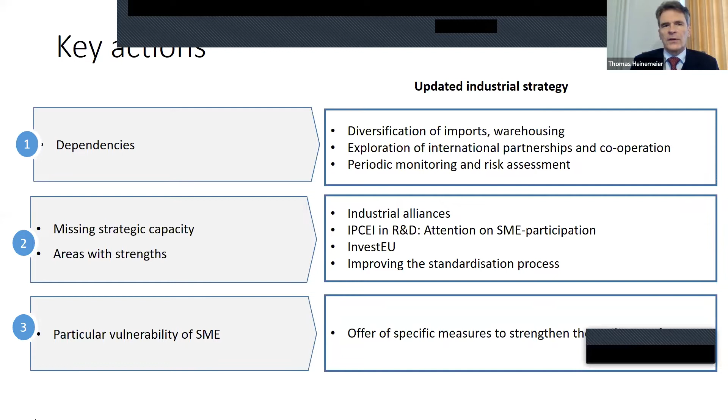In this regard, but not only, we will also pay particular attention to SME participation, especially, but not only, that also some startups can take part in these.

For the third lesson, the acceleration, the so-called transition pathways shall be elaborated to define what shall actually be done, what is needed in the industrial ecosystems to get the twin transitions actually done. I will come back to that later.

We are very aware that this can only be done together with industry, on one side the industrial alliances, but also to define what needs to be done, the industry forum. Here, in the context of the industry forum, we have a task force on advanced manufacturing, where the additive manufacturing topic is very prominent. CECIMO is actually one of the co-responsible organizations, and we are glad that they take over this function and work well together with us in this context.

Mr. Riquet has already mentioned it: the regulatory framework has to be set well for what is needed for the transitions. On one side, that one actually knows how the innovations have to be specified, what one has to do, but then also for the diffusion across the economy.

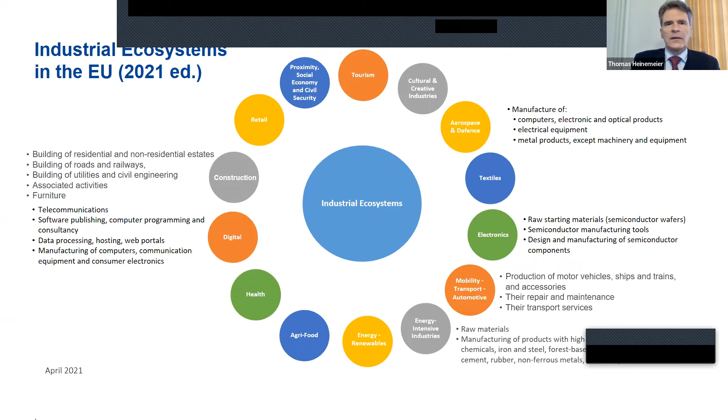Now, transition pathways will be defined per industrial ecosystem, as actionable plans dealing with certain milestones that have to be achieved in the future, the regulatory conditions, investment needs, how they can be financed, skill needs and possibilities, but also international aspects, like regulatory cooperation with our partners to reduce difficulties in entering other geographic markets, and also demand stimulation with regard to diffusion and others.

Now, these pathways we cannot define ourselves. Here we depend and rely on industry. The basis is that one needs a bottom-up understanding of what researchers and industry need. The Industrial Forum is one such instrument, already mentioned, but there are also, depending on the ecosystems and policy mechanisms that colleagues have, certain expert groups.

Then scenarios on possible pathways will be subject to public consultations. Two are already out. One may be of interest, especially on the material side for you, which is the energy-intensive industrial ecosystem.

Thank you, David. Before I start, I just want to say thank you for your support on this initiative today. It's nice to see you again. Thank you for the floor, and thank you to everybody else for their participation today. I've just got a few slides to show you before we get on to the really interesting subject, which is, of course, the panelists. So I won't take too much of your time.

Briefly, for those of you who are not familiar with CECIMO, we are an umbrella organisation that has served since 1950 the common interests of machine tool industries and related manufacturing technologies, both at EU and global level. CECIMO promotes our industries in Brussels, and we are experts in the field of economy, technology and innovation for those sectors. Our members consist of 15 national associations who themselves do a fantastic job of promoting AM and its best practice use in their specific countries. So we're very much a collaborative approach across Europe.

The association's goal is to promote the AM sector, raise awareness to policymakers and other relevant stakeholders, hence the conference today. We offer a platform for the AM community to discuss elements of their business, and in particular those subjects important to them: market growth, and indeed barriers to growth, be they regulatory or non-regulatory. We also talk funding, from R&D through to production of parts. We support efforts on standardization and certification, which are incredibly important for our industry to grow and mature. And also, of course, a subject very close to my own heart, the skills shortage.

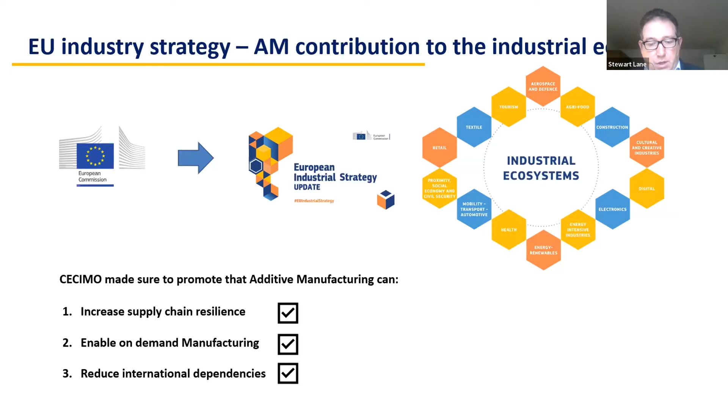The second initiative is the circular economy action plan, also launched in 2020. Such a plan includes several policy initiatives that will bring the EU closer to increasing its overall sustainability objectives. Although many of the circular economy action plan initiatives focus on a limited market segment, they provide an opportunity, and I think we heard about these horizontal classifications earlier, for governments and business to look at technologies that enable sustainability.

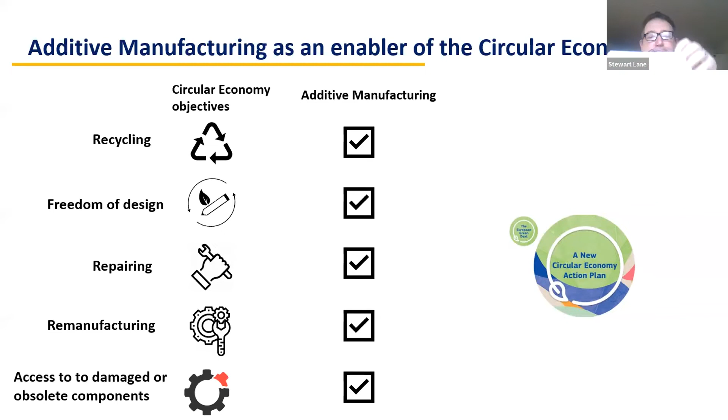As the US remains a key commercial partner for the European machine tool industry, CECIMO will be an active member of this new platform, and we will provide critical input on harmonized standards, export controls, and indeed global trade challenges.

Finally, we must all recognize that there will be no digital and green transition without a skilled workforce. Therefore, industry and policymakers have an unprecedented opportunity to finance and develop specific measures to prepare the workforce for the many changes brought by this new digital and sustainable transition. The lack of available skills in additive manufacturing remains one of the largest challenges for our sector's potential.

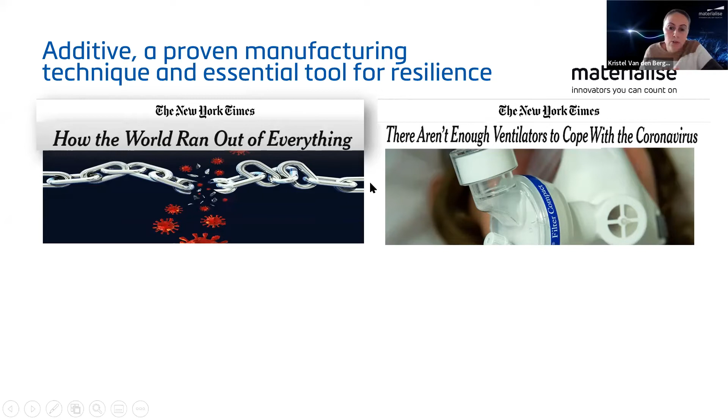So this only strengthened the growing reputation of additive manufacturing as a real tool for resilience, but also as a valid tool for production, end part production, both in aerospace. It has gained its mark as well in very certified environments like the medical implant sector.

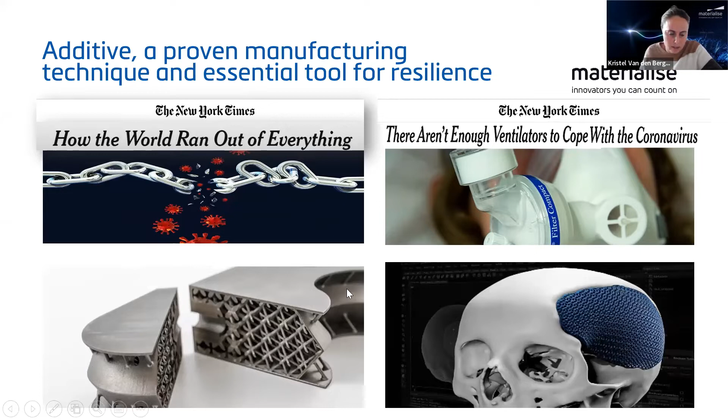Now, this is good news because additive is really moving high up on the agenda of business leaders, not just business leaders, also policymakers. And that's great. In fact, 90% today of leaders want to adopt additive manufacturing as a manufacturing technology.

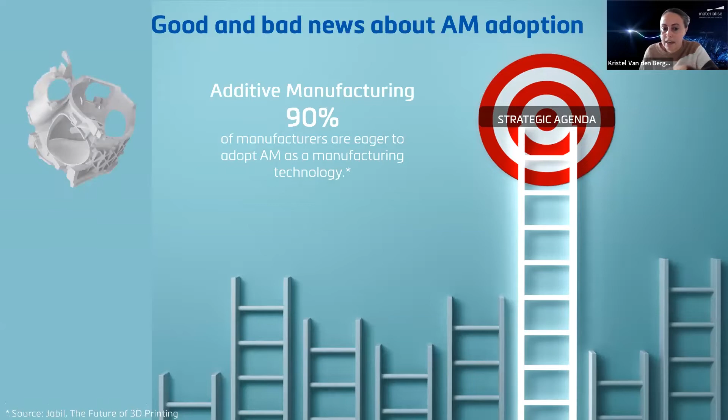The bad news is that today, 80% of manufacturers are still working mainly on rapid prototyping. So how do we explain this gap?

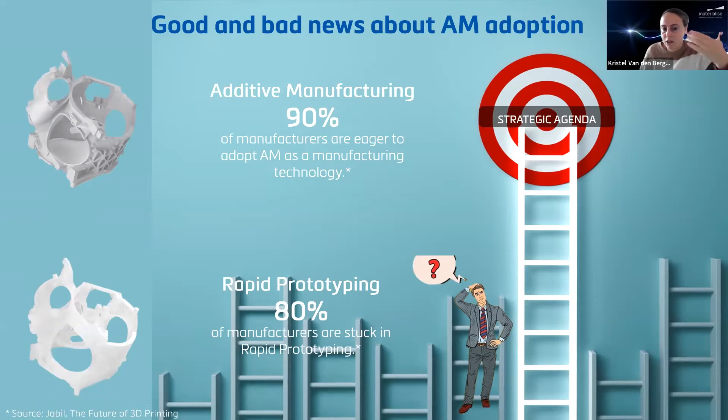Well, because rapid prototyping, which is really enabling fast product development, is a whole new paradigm compared to certified additive manufacturing. In prototyping, it's all about speed, but these prototypes don't need to meet end requirements, so they mainly serve illustrative purposes or to speed up development. Whereas when you're really talking about parts that go into airplanes or parts that go into bodies, obviously there you need to meet a whole spectrum of requirements.

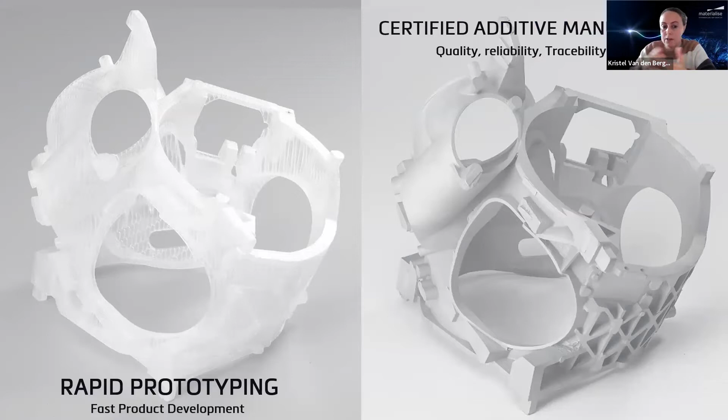You need to also ensure the quality, reliability, and traceability. So this is a huge challenge, and to get from point A to point B is quite a complex journey.

In fact, Materialise has been in this space for more than 30 years. So the first thing we actually built are the three core capabilities you need to be able to produce. We are a leader in software for additive, we have one of the most complete additive manufacturing plants in the world with a very broad range of materials and different printing technologies, and we have the largest pool of engineers — software engineers, clinical engineers, and medical and design engineers.

Now you could say, wow, that's already a great achievement and we're enabling a lot of companies, but this was never the end goal of our company. The end goal really was enabling new and meaningful applications of 3D printing, and that's something we've also done in parallel.

So here on the left, you can see our vertical applications. We are producing our own medical implants in Leuven, in our ISO 13485 production facility. We have a whole production line now set up for eyewear frames. We are in the business of tooling for automotive, and there are other production lines not shown here.

And so when I speak about applications, it's really about going from an idea, a vision of revolutionizing healthcare, which we started 20 years ago, to now today going up to a fully certified and automated production line specifically for that application.

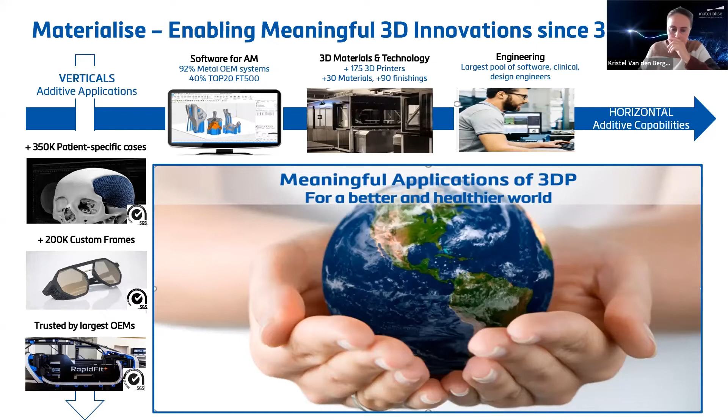And going through this journey really gave us some important lessons. The first lesson is that additive manufacturing does not start with buying hardware. It's not plug and play. It doesn't happen overnight. Now you could say that's a very obvious thing, but it's really not, because I've seen so many hospitals and companies sitting on very expensive equipment just collecting dust, because they haven't thought about the applications, the needs, the product requirements, and they get stuck in a sunk cost fallacy. So that's a lesson we've learned.

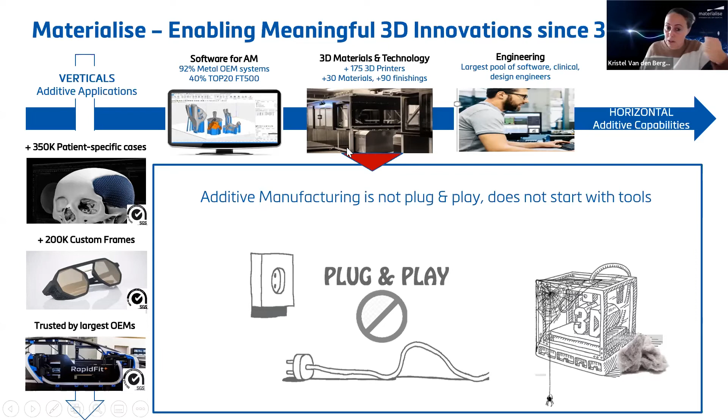And a second lesson we've learned: additive manufacturing truly is a complex journey, with really distinct stages and phases you have to go through. Once you have your application and your business case, you want to scale up production and invest in the right equipment. But many companies skip a lot of these steps.

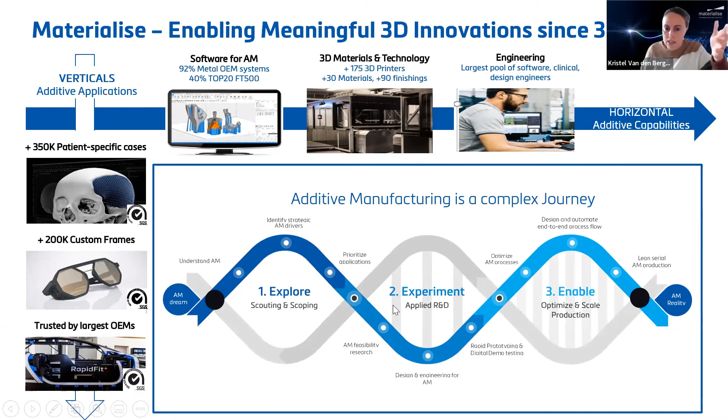Now, to be successful at navigating this journey, there are two things I believe are really crucial. The first is you need an impetus for change—an important, urgent, and relevant reason. You don't want to 3D print for the sake of 3D printing. If you don't have that catalyst, or the business case isn't valid enough, you will probably not get through it.

The second point is you need guidance and expertise, access to knowledge, experience, and capability. So I was very glad to hear that is something the EU will also invest in making available, because it is really crucial.

And to not keep it too theoretical, I want to run through some cases to show how we, with Materialise and my team, the Mindware consultancy team, try to enable companies who are in very different stages of the journey, who have different drivers. I've listed some of them here, and they also have different challenges related to where they are in their journey.

So let me get started with the first case study: CNH, a global agricultural manufacturing company. CNH was already working with additive manufacturing for several years. They had a dream to digitize their inventory—this has been said many times—because you can order spares without delay or overstock, and you can engage in distributed manufacturing.

What were they doing for several years? They started mainly with rapid prototyping. They had one full-time equivalent working on Industry 4.0. But in reality, despite these efforts, it was very slow progress, because there was no urgency. As I mentioned, you need a catalyst.

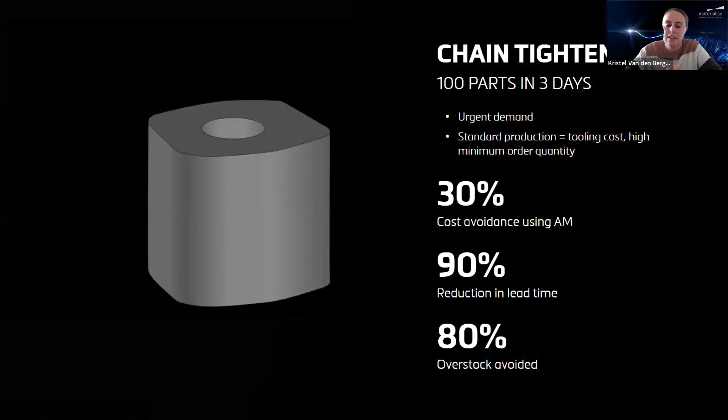So CNH reached out to Materialise for this component, a chain tightener. As you can see, it doesn't have a lot of design complexity, because that's not the point here. The point is, can you produce these components on demand urgently so we can plug them into our assembly line and avoid a standstill? There was no file available either, so we had to reverse engineer the component, produce it, and ship it to CNH—additive basically saved the day. But this was obviously a big wake-up call.

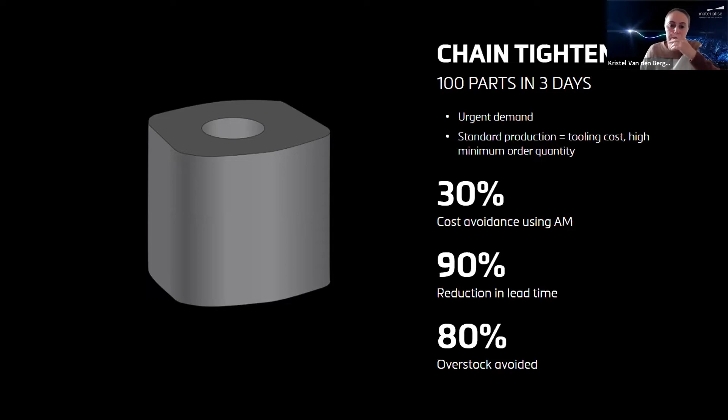So after that, CNH realized, okay, we're spending a lot of effort on 3D printing, but it's not coordinated—we don't have a global strategy. So the next step in our collaboration was setting that corporate additive strategy, looking at the corporate goals and the business context they were operating in, translating that into additive business goals with a lot of focus areas. One focus area was aftermarket. Another was how we can include additive already in the design of new tractors and new end parts.

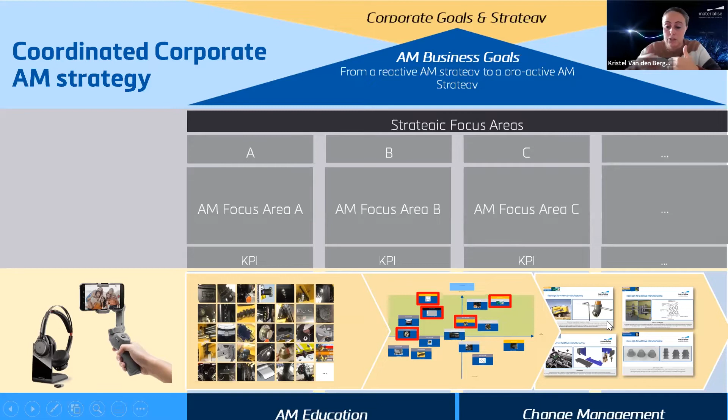And here you see one complete fast track we had on the spare parts, where we really helped them find and screen new additive applications, and prioritize them—because just because a spare part has a big business need doesn't mean it's good for additive manufacturing. That's where our experts really help them, redesigning and engineering for printability and enhanced functionality. This is a program we have set up with them.

And we're proud to say that 1.5 years later, CNH estimates around 50% of their global production facilities are now really working on additive, not just for prototyping, but also for end parts.

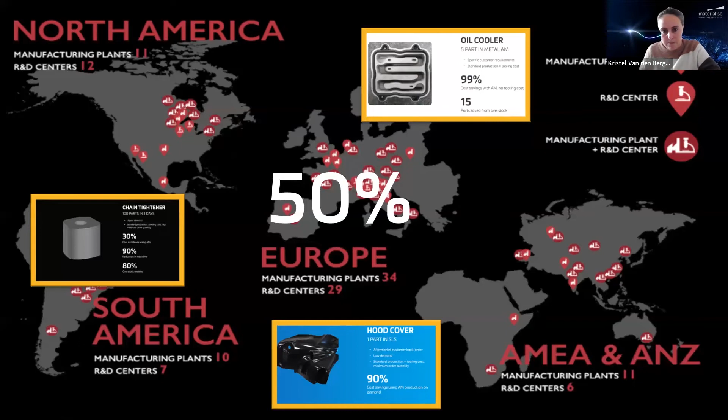So in conclusion, the catalyst for additive here was a broken supply chain and risk mitigation. The driver is on-demand distributed manufacturing and accessibility to small series. The scope is both end parts and production process parts, like a part of an assembly line. And the challenge was the strategy, the screening and selection of applications, and the design engineering for parts.

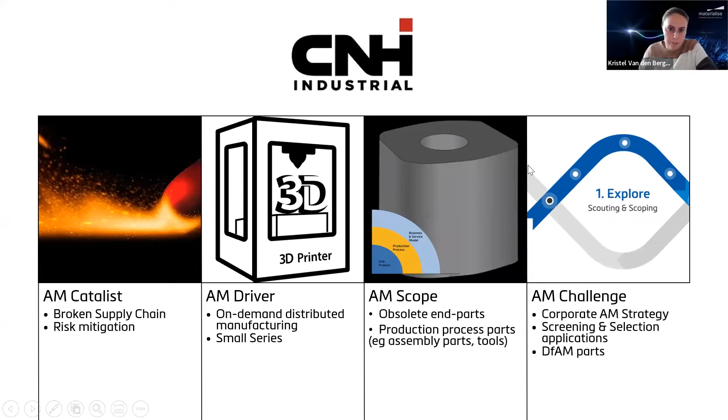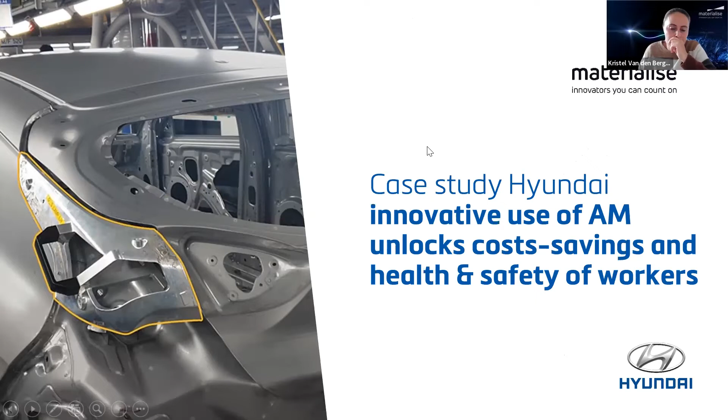The second case study is for Hyundai Automotive. Hyundai Automotive has the largest manufacturing plant based in Korea, in Ulsan to be precise. And we were actually invited by the government of Korea because, just like in Europe, the goal is to really enhance skills and adoption of additive manufacturing. So I find that a very interesting approach, and I think it would be great if we can do a similar type of co-creation project in Europe.

So what we do here is that this plant in Ulsan produces around 50 new car models globally a year. Here you can see the production line, where line workers have to inspect the body of the car to make sure there's no gap and flush errors. This is done both in a mass production stage before the car leaves the plant, and also in the pre-production stage, because if there's any design errors, you want to know that before you launch this new model into mass production.

Reversing that would be very, very expensive. Now, to do that, these workers use inspection tools. Those are jigs and fixtures, handheld tools. This is an example of the traditionally manufactured jig in aluminium. And there were quite some issues with these jigs.

First of all, the lead time. These components, it took three months when a new car model was designed to get these finished goods. It was too slow, because if you got the pre-production running and you don't have the jigs yet, there was a risk that these cars would go into mass manufacturing with errors. So that's the first problem.

Secondly, the accuracy of the jig was 0.15 millimeter. Ideally, if you want to also work at mass production standards, you want to bring that down to an accuracy of 0.1 millimeter. And then the weight - this is very important because it was weighing 1.8 kilograms. Workers had to lift the device 100 times at the speed of once per minute. So you can imagine this was also not ideal for the health and safety of the workers.

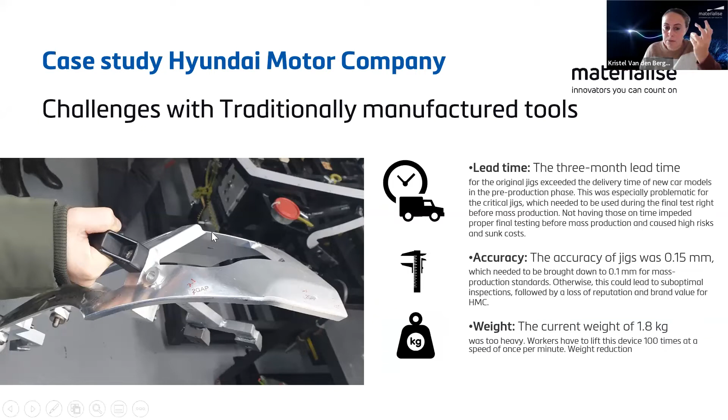So the next step was to say, okay, how can you use additive to reinvent and improve those jigs? We had to think, okay, how should we adapt the design? Which kind of technology and material should we use? And is there any finishing needed?

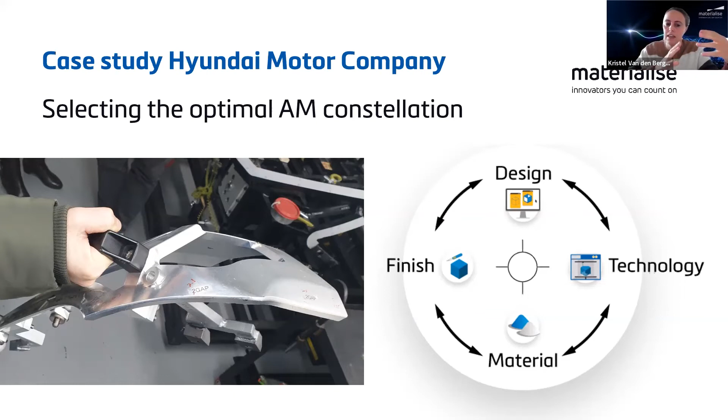Now, this seems like a quite simple question, but a lot of companies struggle here because they think, for like, if it was aluminium, of course we will go for aluminium. We've seen that a lot in the manufacturing sector, that this traditional way of thinking keeps them fixed. Now, I have to admit it's not an easy question because today the battery of materials and technologies with additive is growing so vast, also the finishing options, that it's a bit like a maze and companies need to get through it efficiently. That's really where we come in with the experts to help them make the right choices based on the application.

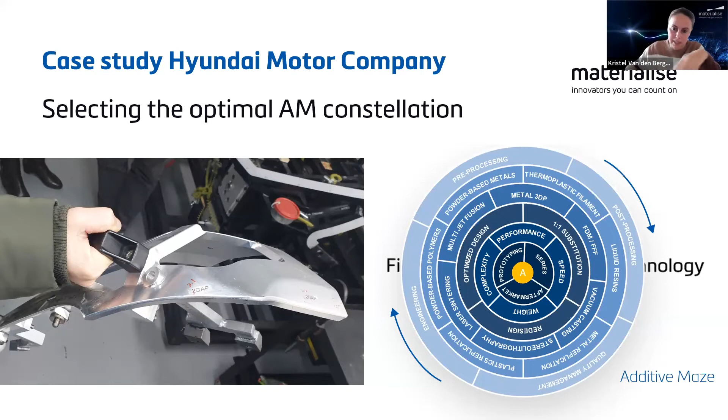Now, in this case specifically, we moved on to a selective laser sintering component. We used polyamide filled with aluminium, so we call that alumide. Because we had these particles inside, we were still able to mill the part and reach a very high accuracy. If you also look at the design, it's a lightweight structure, but still strong thanks to the honeycomb design. And finally, of course, it was milled and painted as a finish.

Now, this component really was a two-in-one solution. It was accurate enough to use in pre-production and in mass production. It had the same accuracy, but it was 50% lighter, which is very important for the workers. There was no assembly because we could do integrated functionality of the locators. And most importantly as well, the desired lead time - we were able to bring that down to 1 month and prevent design errors going to mass production.

Now, this was a quite successful project. I think we've done it in a month and a half, from spotting a need in that entire plant to delivering such a solution.

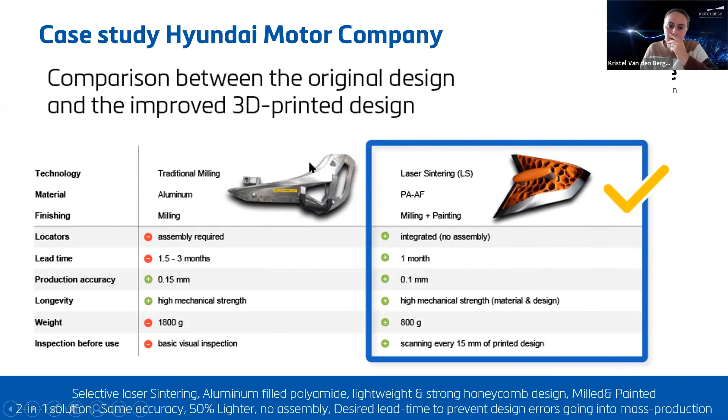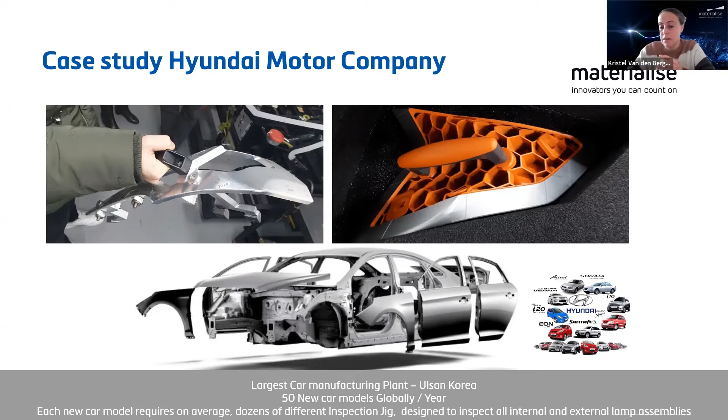If you think about the fact that today at Hyundai they produce 50 new car models globally, and every car model requires on average dozens of different inspection jigs only for the lamp assemblies, you can imagine these kinds of solutions are really mass custom production tools for Hyundai and will have a major impact on their global operations.

To conclude, the catalyst here is both costs for avoiding recalls, risk mitigation on branding and reputation of wrong cars in the market, and the health and safety of workers. The driver is the customization of tooling, the lightweight design, the fast lead times. The scope here is not the end product - we did not work on the car, but we worked on jigs and fixtures, so on the process. The challenge was to find the right material and technology design options, redesign and produce a working prototype in a short lead time.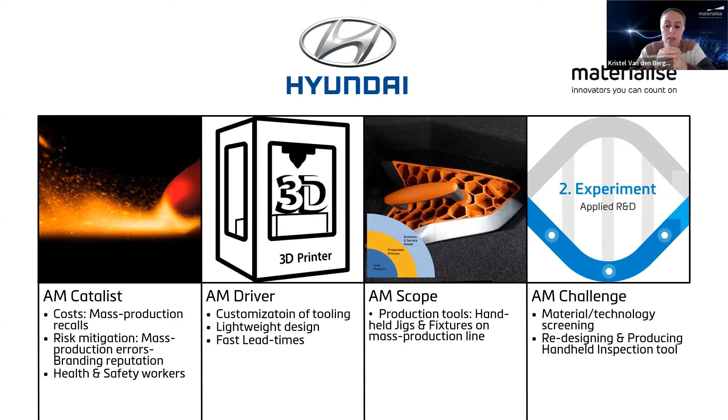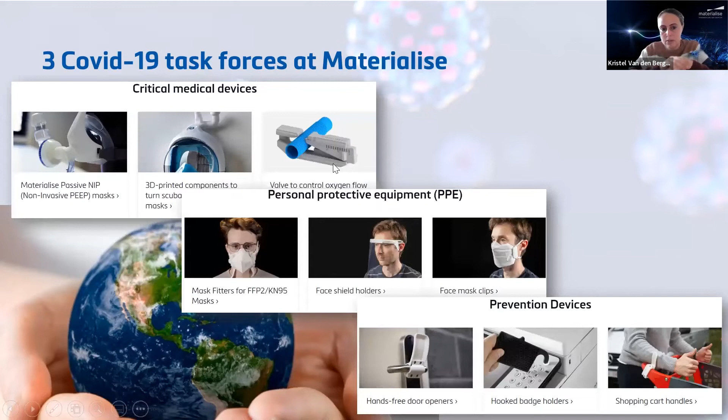My final case study is about the medtech industry, and it's an example from Materialise ourselves, because as you know we are really also a medical device company. When COVID hit us, the first thing that was done at Materialise was setting up 3 task forces to create new products that were acutely needed in the market. We had 3 teams: one working on critical medical devices, one on protective equipment, and finally on prevention devices - gadgets to help avoid spreading the virus.

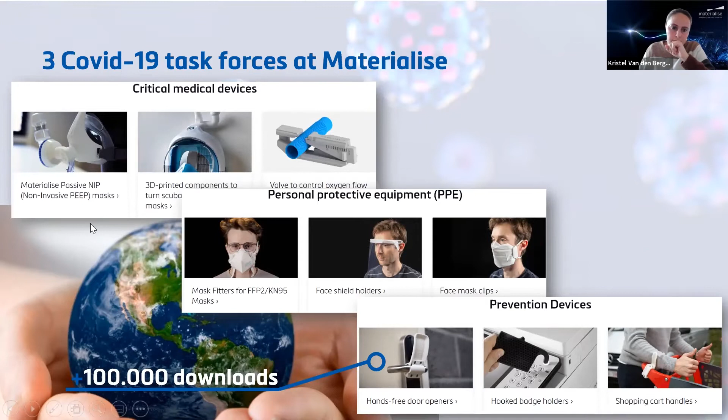For example, our hands-free door opener, developed in a week's time, received more than 100,000 downloads - a nice example of once you have a file, you can put it in the cloud and distributed manufacturing can happen locally. But what I want to talk about today is this passive PEEP mask, because that was really an excellent achievement of what our company was able to realize.

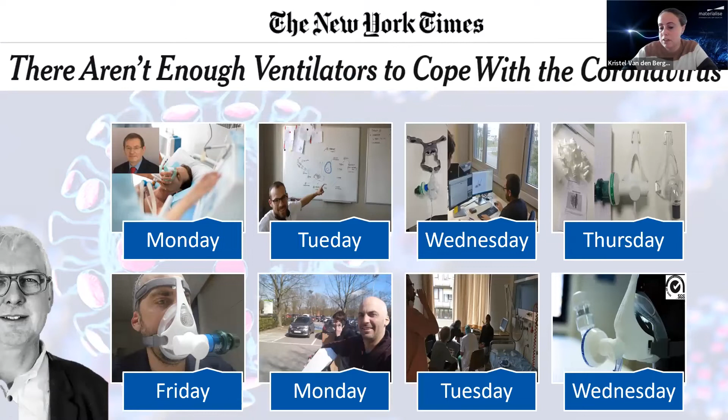At a certain time there were many patients in the hospitals, but there were not enough ventilators to cope with this crisis, and people were literally dying because of that. So pulmonologists reached out and said, okay, we need to quickly develop a new solution together with the engineering team of Materialise. Our CEO was the one to say, okay, there is an acute need in the market, we need to act fast.

In 2 weeks' time we were able to develop this PEEP mask, which basically gave positive pressure on the lungs, avoiding fluid in the lungs from building up again. Hence, people with this mask did not need a ventilator anymore. Why am I putting this here? Because it really proves that with additive manufacturing you can go in 4 weeks' time from a drawing on the whiteboard, discussed with experts from both sides, to having first prototypes, and finally to having a fully certified product available to save lives.

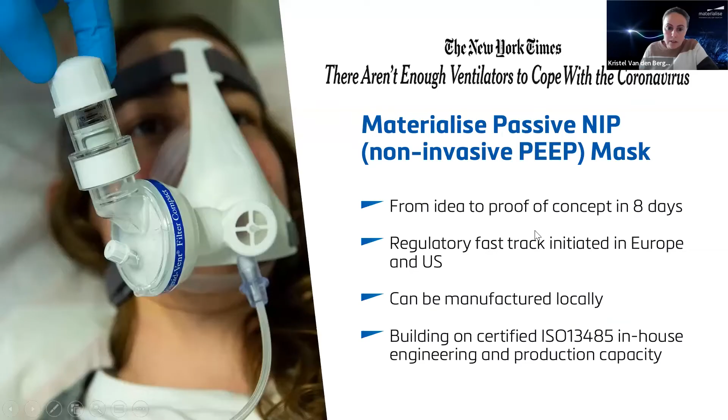We went from idea to concept in 8 days, and then there was another 2 weeks that was fast-tracked by the regulatory authorities to get clearance for this. This is really important because if it was not for this collaboration with the authorities, this device would not have been made available. We also made the file available to different hospitals with printing capacities, so it could be manufactured locally. This result was also only possible because for 20 years now we have been producing medical devices, so we have in-house capabilities on engineering and production.

So here the catalyst was acute need in the market due to the lack of ventilators. The driver here is fast end product development, small series. The scope was really an end part - it was a medical device, a PEEP mask. And the challenge was to really engage in rapid product development, but also use the current production capacity and tailor it to this device.

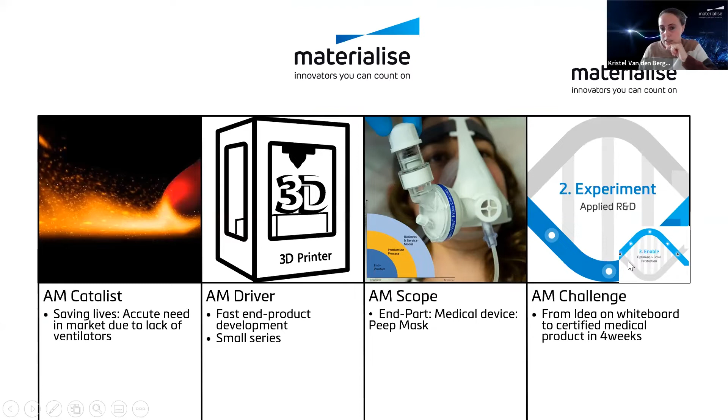Now I showed you a couple of examples. I don't have a lot of time, it's only 10 minutes, and there are other stories that I could have shown you. I mainly focused on the first 2 stages. In the enable phase, it's more about companies who need to scale up their production, and so they're really struggling with automation of their process flow, certification and qualification. But this was just to give you a flavor.

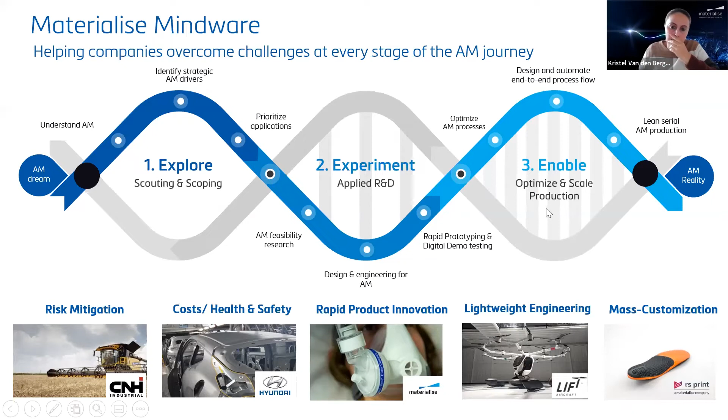What I would like you to really remember is that we all now know we want to get to additive manufacturing, but the reality is a lot of companies are stuck in prototyping. The answer is going through the journey with the right experts, with companies with the right capabilities, also with the regulatory authorities and the government. The only way to do it is finding the right catalysts for change, the real reason why you want to engage in additive, and also really partnering up to get access to knowledge, experience, and capabilities in additive manufacturing. That was my presentation, and if you have any questions I will be happy to answer them later in the panel, or you can get in touch with me later.

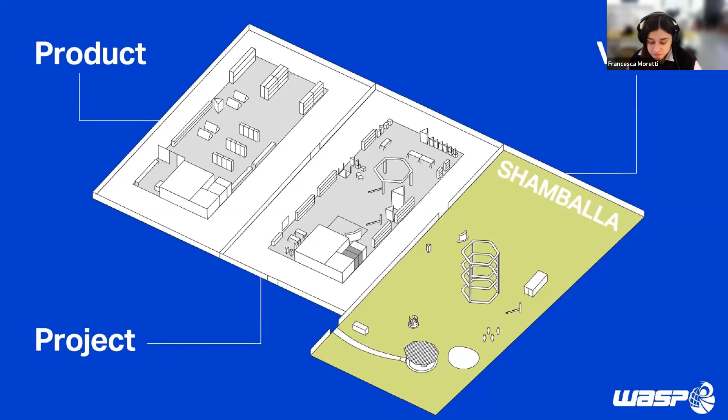The basic needs we found were food, house, energy, work, and art and culture, and we thought 3D printing was a good way to make applications in all these fields. Today we will talk about houses and what we found in this research.

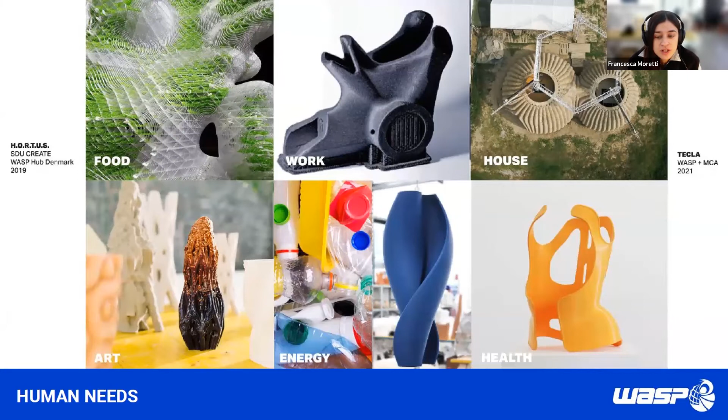We have here some example houses. I think this is the most disruptive thing WASP has done, but also health applications, energy with recycled plastic we printed directly with our printers, work with a technical thermoplastic, and food with vertical application. And art material with ceramic, because we started with small printers that we scaled up to the big one we have for clay and earth. We also have this application with ceramic and 3D printing.

The proof of concept we had at first was Gaia, next to our headquarters. As you can see here, you have this wall. It's totally 3D printed with local soil.

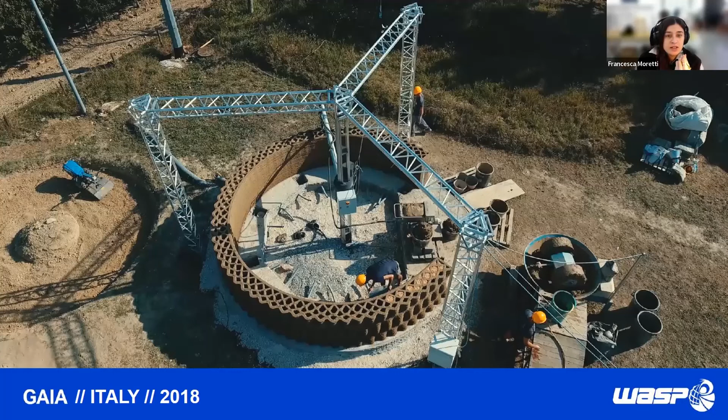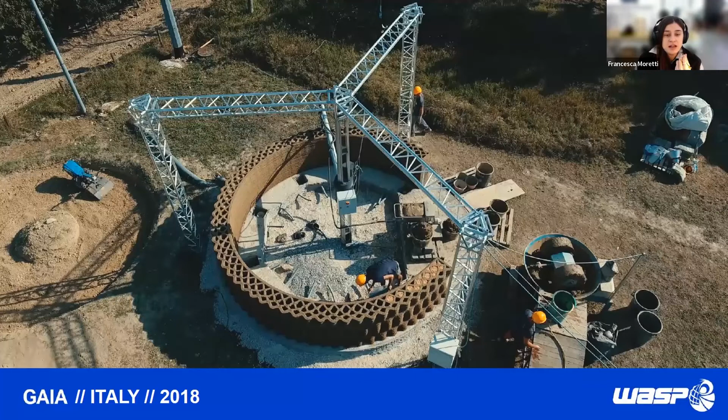Here are the settings of the on-site building, where we have this frame. This machine is called Crane WASP. It's basically a kind of crane or arm that you can easily move around the world in a container. The design of it was made to be easily moved and managed with 3 to 4 people in a day, starting printing directly using the soil we have on the place we go to print.

Why? Because we thought, as the pottery wasp does, that using as little energy as possible to create material, and printing directly with material without any chemical addition inside, is the best way to give an answer to the needs we will have in the future for many houses. This is for us the best option, and for sure it's really not easy to achieve.

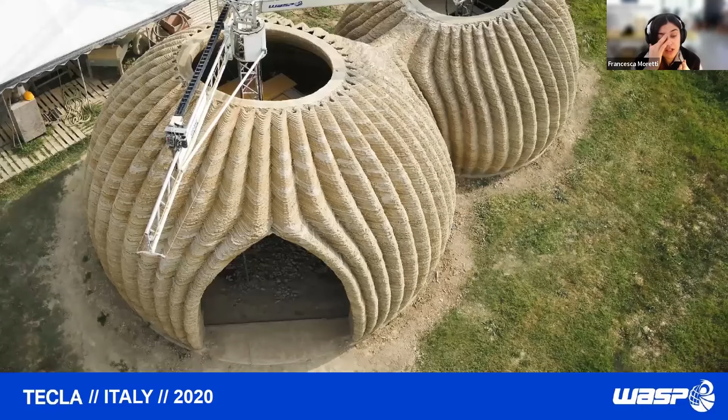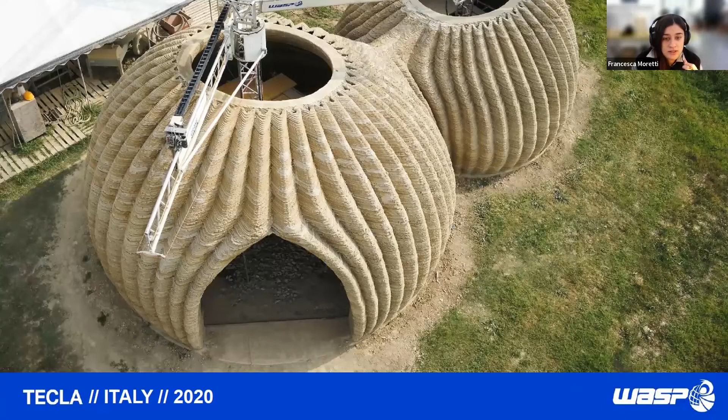You can see here Tecla. Around 2 years ago, we began the research, and we have here something that doesn't need a roof, because we are thinking that we can also print in a place where wood is not easy to achieve. This is a really challenging research project.

I thought Gaia is easier to replicate around the world instead of Tecla, but we want to push the technology and our research to the limit to better understand the possibility for the future, and also not only the future, but what we can do now for the needs of humans and the needs of our planet in terms of environment and eco-sustainability.

We have here the first case study in the world, I think, where you can see two arms that work together simultaneously to print directly on site with the material we have. Also here in the left-hand corner, you see the material we took directly on site. About the material, there's a lot of things to tell and introduce to you.

It's not so easy as I'm explaining now to take earth directly and print something that can be used for people. It's a really big area of research for us, and we have also opened research about geopolymers that we can use instead of cement and regular concrete.

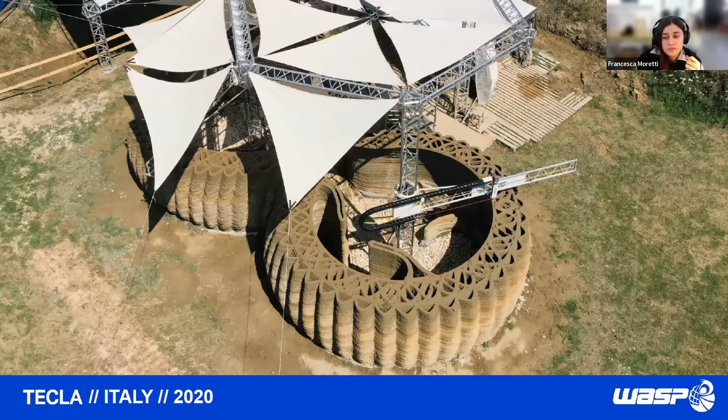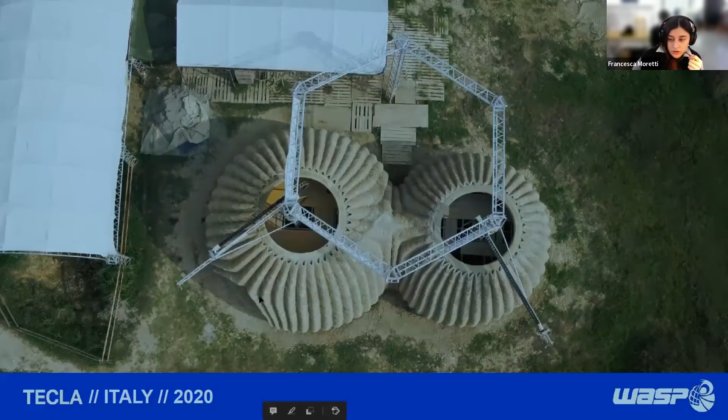Okay, we can go to the next one. Here the same Tecla on top, just to show you. It was really big, a really big object for us, and I think the first dome made by 3D printing.

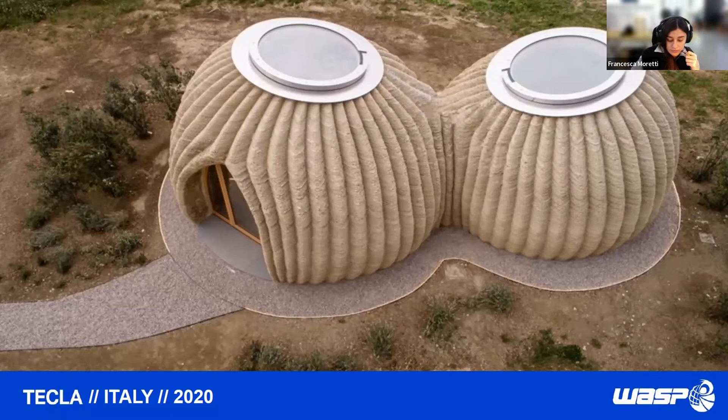This one is a house of dust that we made with a pre-mixed material. The design of this material was the same as the one we had here: sand, raw earth like clay, straw, and husk of rice, because this material was provided by Rice House in Italy. So the next step for us, to make possible our project, is to create a premix material that we can easily reproduce around the world with local soil and local raw fiber in general, as the insects do—working around the place we will print and taking material we can have locally.

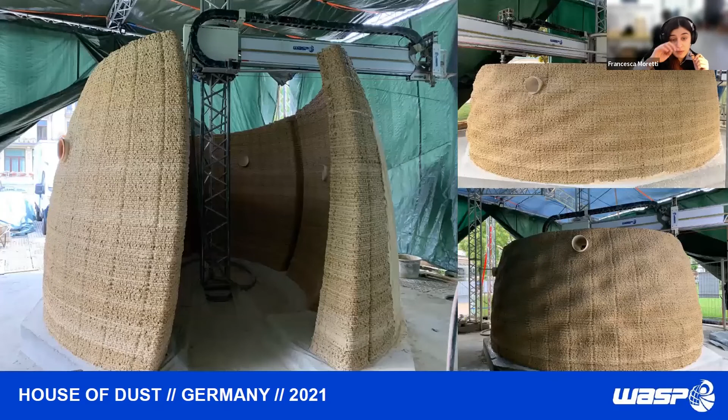Here during the printing, the object was smaller, but the technology is the same.

Here, in the last proof of concept we had in Dubai, this is a concept store with Maison Dior. They accepted the challenging project, and we easily brought the machine directly to Dubai, printing the same natural material mixture, the same natural material mix design we had in Italy.

It was the first time for us having something that can be used for shops, something that can be in real life, as I can say.

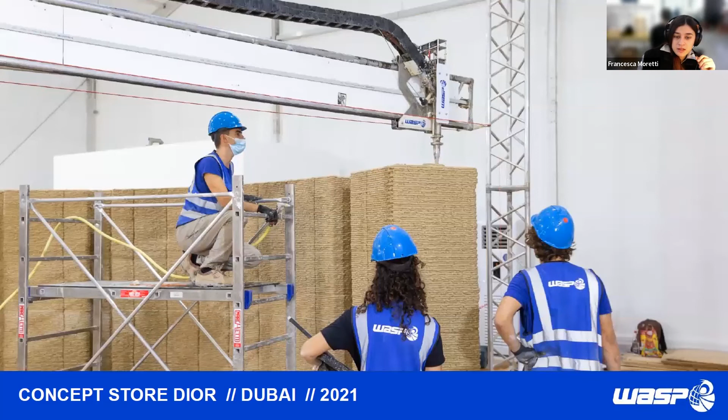Here, during the printing, with the team of WASP. And here the building site.

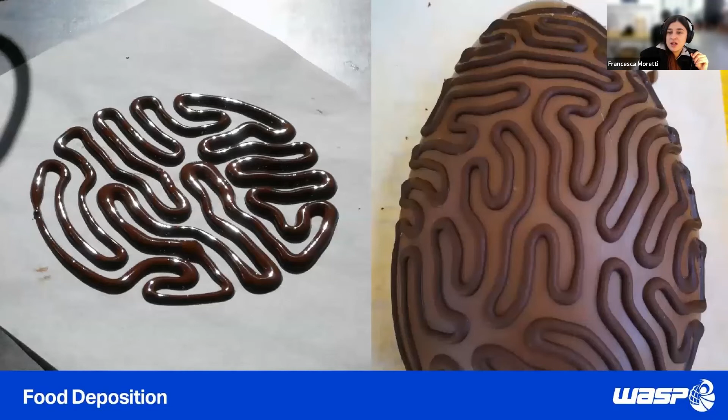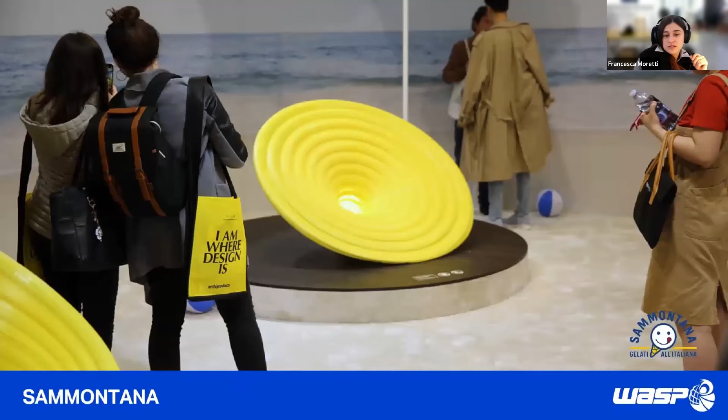Next, all the applications of WASP in terms of food, energy, but I think our time is done. So as you prefer, we can go really quick. Here the application and the blender we have done.

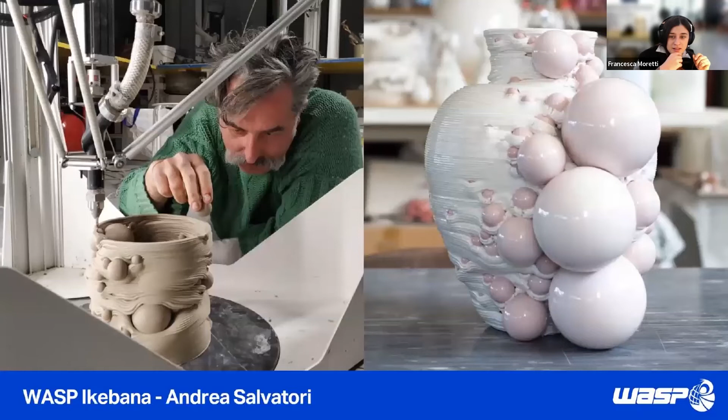Thank you very much for that really inspiring presentation. It's truly amazing what you have been able to achieve with the construction technology, and we're seeing so much innovation in that segment. So it's really going to be interesting to see what will come.

Our next speaker is Michele Pressacco, who is Vice President of Research and Development at Lima Corporate since 2014. Lima, for those who are not familiar with the company, was one of the very first companies to develop and manufacture implants using additive manufacturing, actual additive manufacturing factories, and it is one of the largest manufacturers of titanium additively manufactured orthopedic implants today. Michele is Vice President of Research and Development at Lima Corporate since 2014. Previously, he has covered different roles within the product development division, where he has contributed with over 20 patents and the launch of several successful products. He is a member of the management team and the IP board within Lima Corporate.

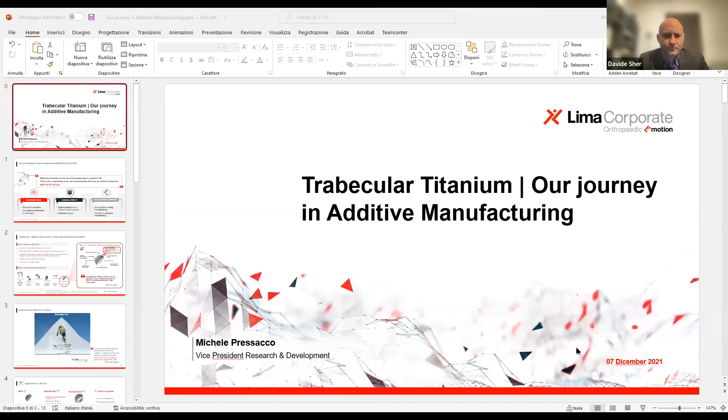Okay, so good morning. My name is Michele Pressacco. I'm the Vice President of Research and Development of Lima Corporate, and it's my pleasure to introduce you to our Trabecular Titanium technology and our journey in additive manufacturing.

Before doing that, a couple of words about Lima Corporate. Lima is an Italian-based global medical device manufacturer providing reconstructive and custom-made solutions to orthopedic surgeons who are facing the challenges of improving the life of their patients. We believe that restoring movement can be one of the greatest joys in a person's life. This is why in everything we do, we are passionately driven by our desire to restore the emotion of motion.

We do that thanks to a pioneer vision to deliver innovation and drive digital transformation of orthopedics. The patient is at the center of what we do as we continuously collaborate with surgeons to improve clinical outcomes. We are recognized for Italian design, deep expertise in engineering, as well as in advanced manufacturing. Lima is for sure considered a leader and a pioneer in 3D printing, being one of the first companies, if not the first company in the world, to take this technology from rapid prototyping into mass production of medical devices.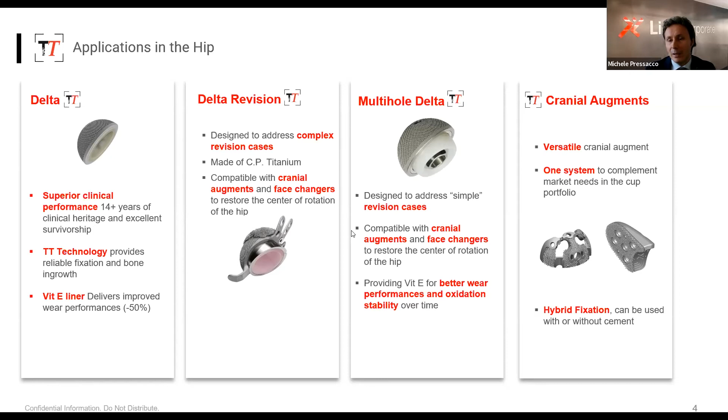Having the same core, compatible with both, gives the surgeon the ability to follow the evolution of the patient, and in case the patient develops cuff tear arthropathy and the shoulder has to be converted from anatomic into reverse to increase stability, they can do that without having the need to remove a fixed component. This, in the end, translates into a less invasive procedure for the patient. Finally, we have completed the shoulder application with what we call the hybrid glenoid.

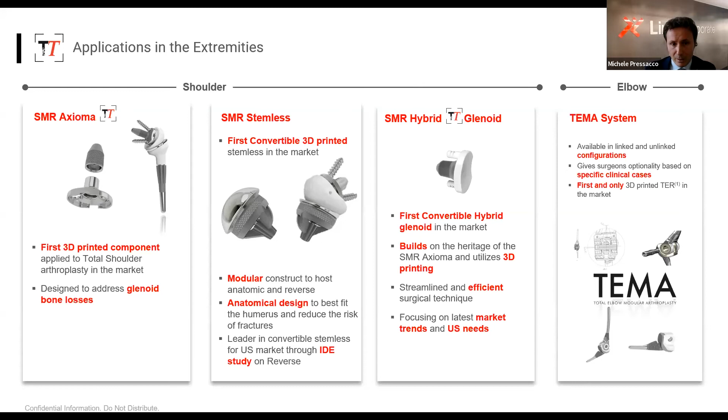And finally, more recently, we have approached the knee with what we call the anatomical metaphyseal fixation cones and the TT tibial plate. The cones are designed to address complex surgeries, to create a sort of reinforcement of the bone to then host and create the support for the knee implant.

This is the first product that we have done which is finished only by means of 3D printing, meaning it does not require additional CNC machining. This is beneficial with the aim to reduce the cost of goods, which is still a barrier in terms of the development of 3D printing technology.

With the metaphyseal tibial plate, we have leveraged not only the capabilities of 3D printing to create lattices for bone ingrowth, but the design has also been topologically optimized with the aim to minimize micromotion, which is fundamental in order to have bone ingrowth, but also to optimize the distribution of stresses from the implant to the bone, and to maximize the fatigue strength of the component.

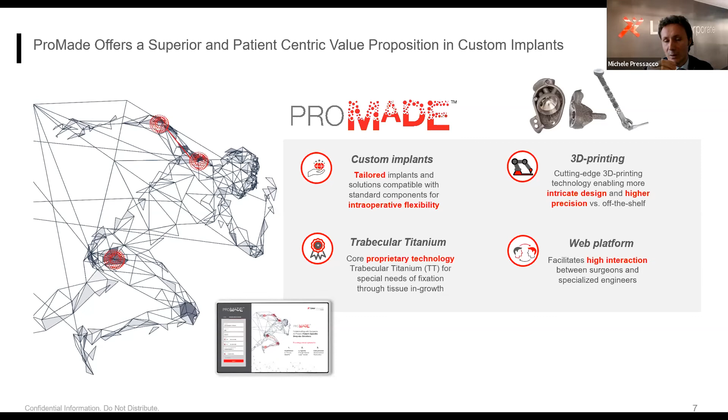The experience and knowledge we have developed in mastering 3D printing for over 15 years has finally been deployed to ProMade, our custom-made division, which leverages the reliability of a process developed for mass production of off-the-shelf products to create bespoke solutions for patients with the most challenging clinical cases. The tailored implants can also be combined with our standard components in order to provide intraoperative flexibility for surgeons.

The process to create a custom-made implant starts from the imaging. The ProMade team received the CT scan of the patient through a web portal, and from the CT scan, they reconstruct the anatomy of the patient. On this anatomy, they design the implant that fits the needs of that specific patient according to the indication we received, working in strict collaboration with the orthopedic surgeon. Then the implant is finally manufactured by means of 3D printing and delivered to the hospital in sterile condition within 4 to 6 weeks lead time.

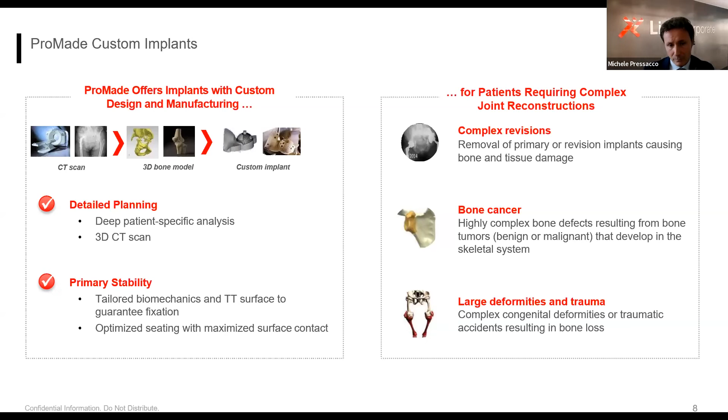What I've presented so far is the first pillar, the hardware of our strategy to deliver innovative hardware that leverages 3D printing for standard off-the-shelf as well as for custom-made products. But with the aim to transform orthopedics, we are adding two other elements: new innovative delivery strategies to provide implants and instruments to the hospital, and the software or digital element, what we call the smart space ecosystem.

In terms of new delivery strategy, in March 2021, we celebrated the grand opening of the first in the world point of care to design and 3D print custom-made solutions inside the hospital. This was done at the Hospital for Special Surgery in New York, Manhattan. This is breaking the ground with the aim to foster and increase the speed and accessibility of custom-made products for patients with very challenging and desperate clinical conditions. Also, the proximity of the engineers with the surgeon will facilitate and speed up the interaction, and hopefully will also improve innovation for future developments.

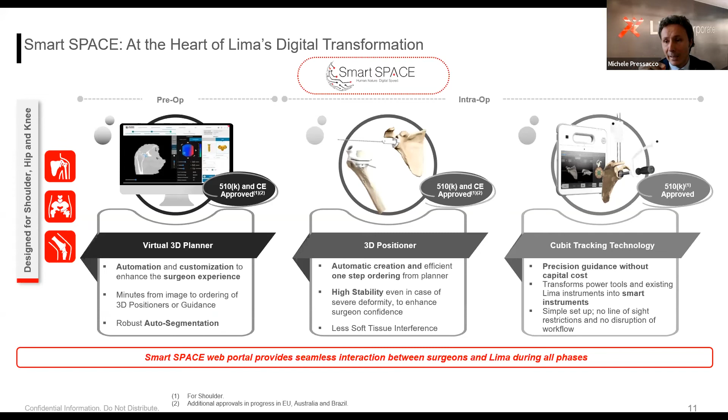With the digital elements, we are giving the surgeons the ability to plan the surgery in 3D. The difference is, in this case, the reconstruction of the anatomy of the patient, thanks to artificial intelligence, is made just in time within the laptop of the surgeon. So the surgeon doesn't have to send the imaging to the engineers and wait for them to reconstruct the anatomy, but can do it just in time within a few minutes on his laptop. Once he has defined the plan, he can then execute it through what we call sensor-based guidance.

Also, 3D printing plays a fundamental role here because the patient-specific instrumentation that we use to map the anatomy for the guidance, or to guide the surgical act, is also made with 3D printing, in this case with selective laser sintering. So in Lima, we started with metal 3D printing, but in the last year, the polymeric part has grown significantly as well.

Bringing my section to a close, today I've shown you how Lima has over 15 years of experience in 3D printing, with several off-the-shelf products developed, and the ability to leverage this knowledge to create custom-made components for the most challenging cases. We set the ground to decentralize 3D printing from the historical production inside the company, and we have taken this into the hospitals, and on top of all these elements, a digital solution to combine with.